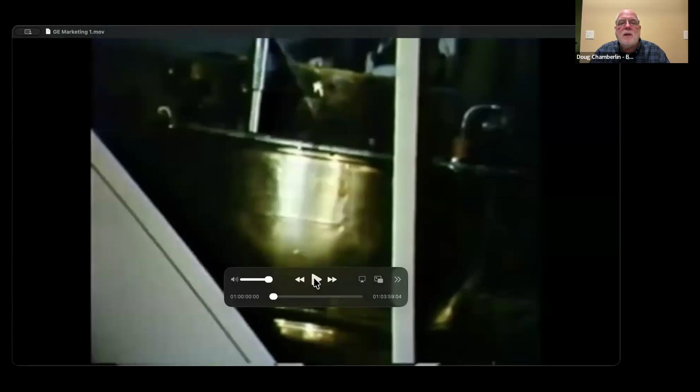We were, of course, absolutely elated with the recovery of the Discoverer 13 capsule. We had been trying for months. We'd had 11 attempts prior to that, and this was the first successful recovery of a man-made object from space. It put the Air Force in a position to proceed with programs that it had been planning and thinking about for a good many years.

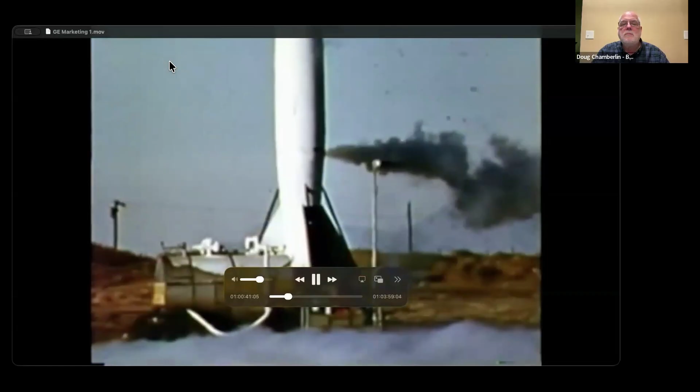I just lost audio. Oh yeah, I've lost audio too. Let's just give it a second. No audio. Can you hear me talking? Yes, okay, I'm working on that.

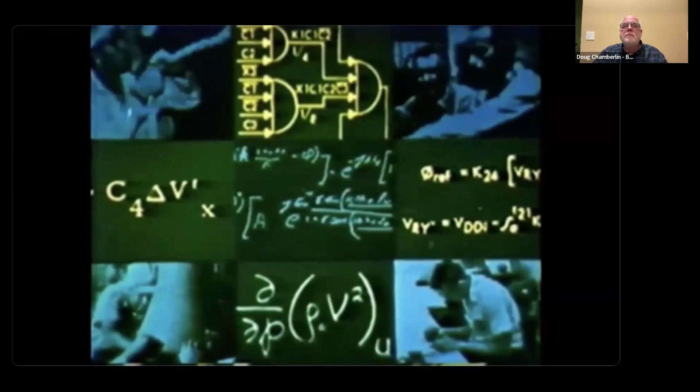Develop an ICBM having a range of 5,500 miles and a 1,500-pound warhead with a yield of 1 megaton should make this an extremely effective strategic weapon in the sense of having great deterrent capability. It became obvious, however, that the Russians were working very hard on a long-range ballistic missile, an ICBM. Through GE as a contractor, radar was installed in Turkey. It was within a few months that we had hard evidence that indeed the Soviets were carrying on a major effort to develop a long-range ballistic missile.

An ICBM program had been authorized. I was given top priority in selecting the people I considered most qualified to work in a program of this kind. A considerable number of academic people from universities entered into the program. We received support from top management in every major company involved in the Atlas program. I recall a letter I got from LaPierre of General Electric in March 1955, in which he indicated the complete support of GE and their desire to be considered as a nose cone contractor.

We were not the only ones working around the clock. So were the people in industry working around the clock. And it was just that kind of a program. Everybody had such dedication and felt this was so important that time, number of hours, meant nothing.

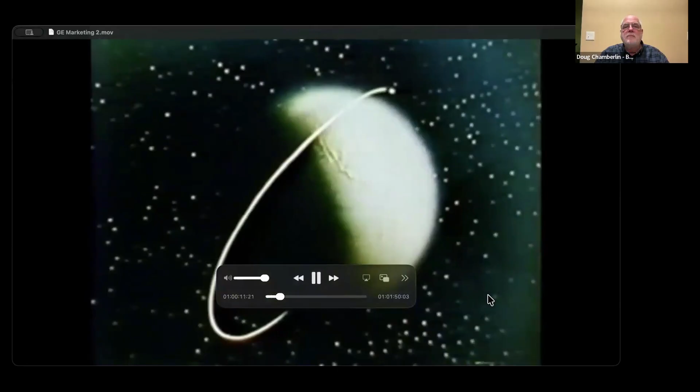So this, of course, is Sputnik.

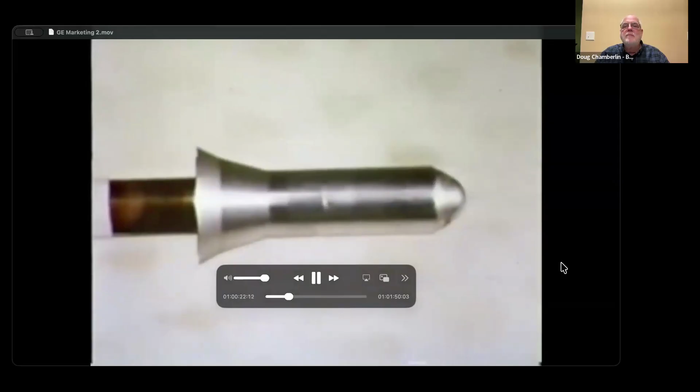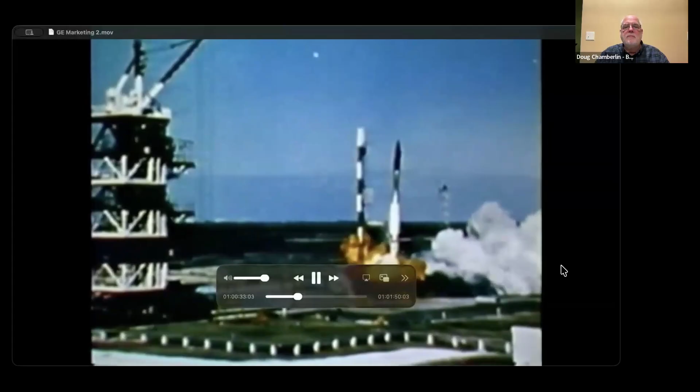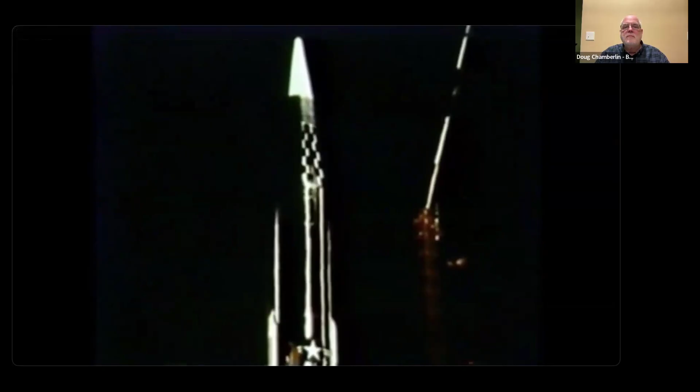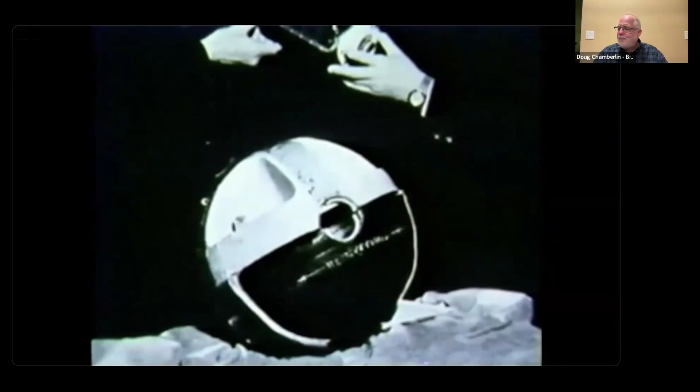As work continued on the Mark II, other test programs were started for new high-performance advanced vehicles, all of which added to America's arsenal of knowledge. The early years had their share of spectacular failures and disappointments, but the lessons learned from these problems and continuous determined effort led to success. The progress was steady and sure as the business grew. The creation of NASA in July 1958 gave solid evidence of increasing government interest and support. Just one month earlier, a data capsule from a Mark II reentry vehicle was recovered, the first payload ever recovered from space. It was one of an impressive list of GE firsts, providing proof of our growing sophistication and capabilities.

The late 50s represented the beginnings of the space age. We ourselves at that time were heavily involved in the reentry systems business, solving the reentry problem of a vehicle coming in from outer space. During that period, we achieved a very impressive list of firsts, and we were involved in a very broad spectrum of technologies. This put us in a strong position for the more sophisticated work of the 60s as it approached us.

So there they were talking about the Mark II, which was an ICBM designation, where GE was working on the Mark I, and then the Mark II. You heard references there to the space part of the mission and so forth. That was all part of the Corona stuff, but of course they couldn't put that information into a marketing video. Those videos were from 1978.

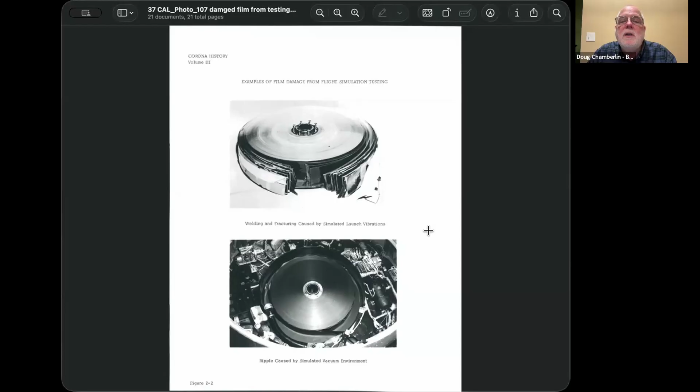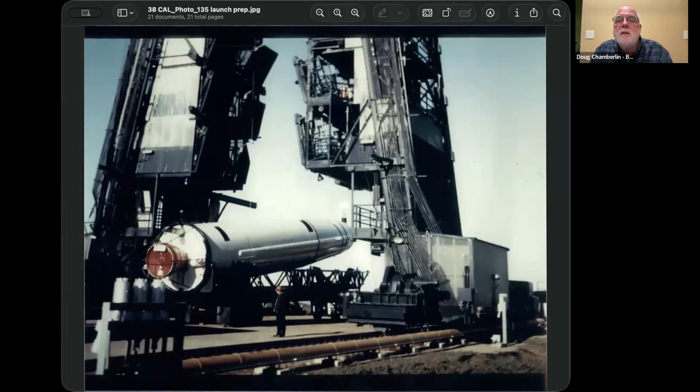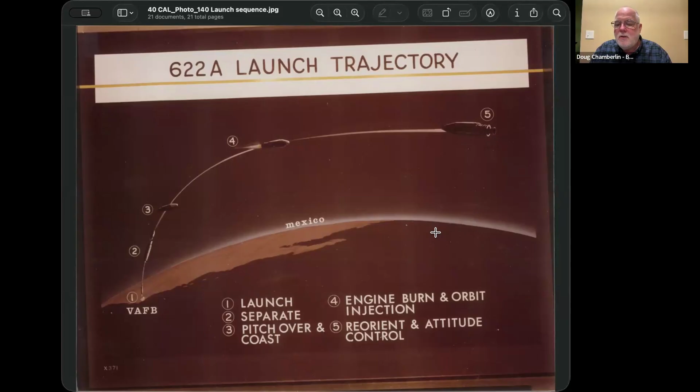So this is a diagram of the launch sequence and the trajectory, and it would come up flying to the south. It would separate from the first booster, and the Agena second stage, number 4 there, would fire, and eventually it would burn out and inject itself into orbit. And at some point it would flip itself around horizontally. It had attitude rockets that were gas-fired rockets, called cold gas because they weren't burning fuel, but they were just spewing gas out in order to rotate the satellite around. I'm not sure if they rotated it and then took pictures, or if they took the pictures first and then rotated it just before reentry. That wasn't clear in anything I was reading, but the thing rotated around so that the nose was pointing backwards.

And when they initiated the reentry sequence, the explosive bolts would release — there was a spring in there actually, so the bolts were holding the recovery vehicle onto the satellite with the spring compressed. And when the bolts were released, the spring would push the recovery vehicle away from the satellite.

It would then have its own short-term solid fuel rocket that would burn for a short period to slow it down enough so that it would deorbit. It would then spin with cold gas rockets around the edge — four of them — that would spin it, and that gave it stability. And so it would orient itself with the nose cone down. Then it would fall down through the atmosphere.

And about 50,000 feet is when the first parachute would open. There were three separate parachutes: a tiny one that would help stabilize it, then a second one with strong enough drag that it would pull the main parachute out. Then that would deploy and it would start falling slower and slower, slow enough for the airplane to snag it. The target altitude for that was, I think, between 10 and 20,000 feet, but closer to 10. It was falling slow enough that the airplanes had multiple chances to fly by and snag it. In fact, the Discoverer 14 mission took them 3 tries to actually capture the recovery vehicle.

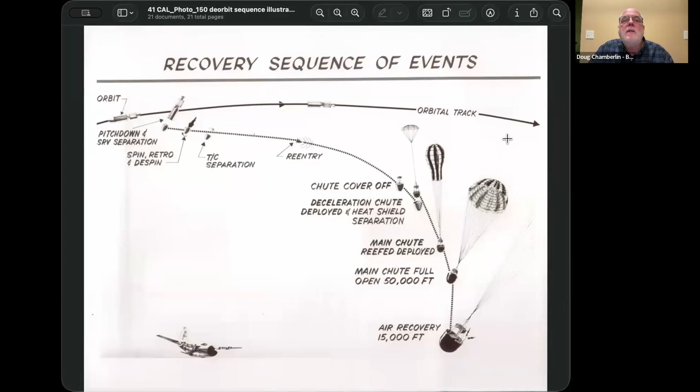Yeah, it got really hot. It got hot enough that the air around the capsule they would call plasma. It was up in the multiple thousands of degrees, and one of the things they had to invent was a heat shield that covered the blunt end of the recovery vehicle that could withstand that kind of heat and not transmit it inside to the film, because they really had to protect that.

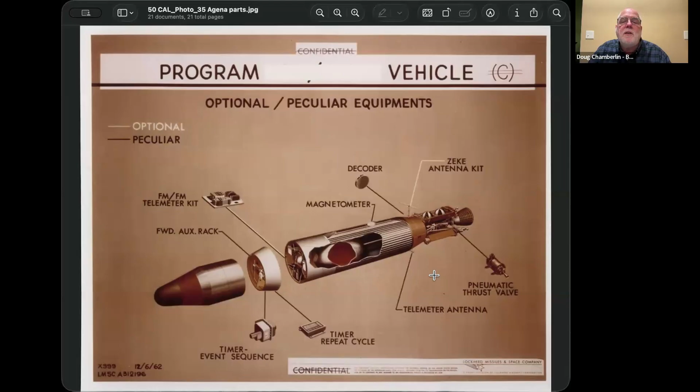This is just another diagram of the satellite, the Agena, and the whited out area at the top I'm sure said Corona/Discoverer. You can see there was a fair amount of space taken up by propellant and the second stage rocket engine. Then there was telemetry, and the left-hand chunk there was all the camera, the film, and the recovery vehicle.

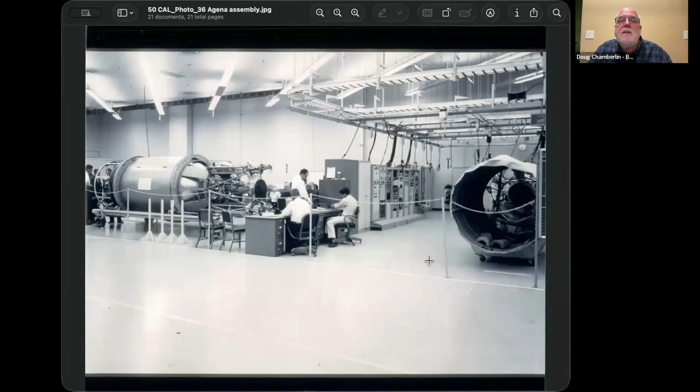There's a picture of them assembling the Agena at Lockheed. Here's a picture of a later satellite, because this one here you can see on the left there were two spools to take up the film. The one that's in the satellite itself has a metal collar around it with some circuitry, mounted where it would go, and then the second one would go on the front of that, where the lower spool would get lifted up and put into there. On the right-hand end, you could see the port where the lens for the camera is sticking out to the side.

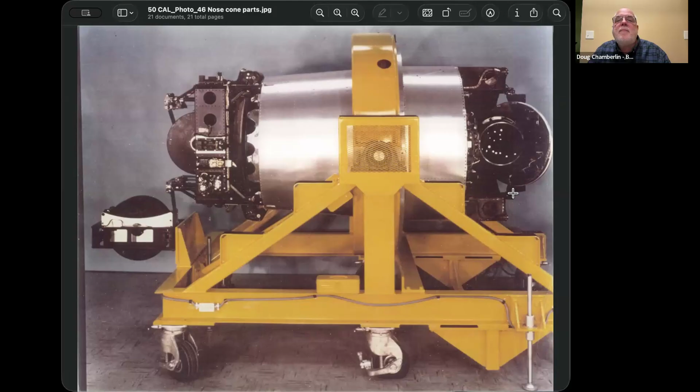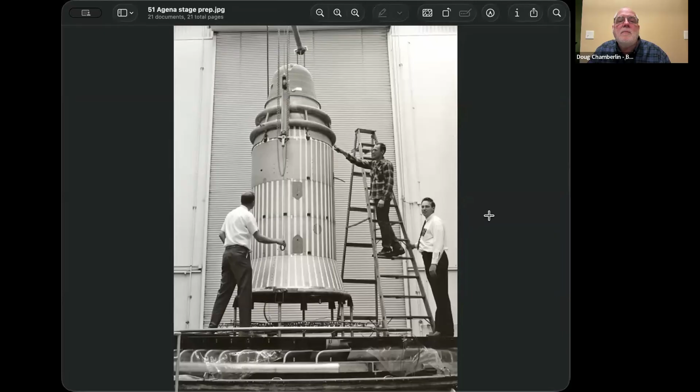And here's some engineers playing around with what looks to me to be a fully assembled satellite.

One was pointed slightly ahead of where the satellite was, and one was pointed slightly behind. They would take pictures of the same thing, but as the satellite moved over the target, first one of them took a picture, and then as it moved farther, the second camera would get to take pictures of it. Then they'd compare them together with stereo viewers, and mostly from the shadows of what was below, the stereo view gave them a sense of how tall things were.

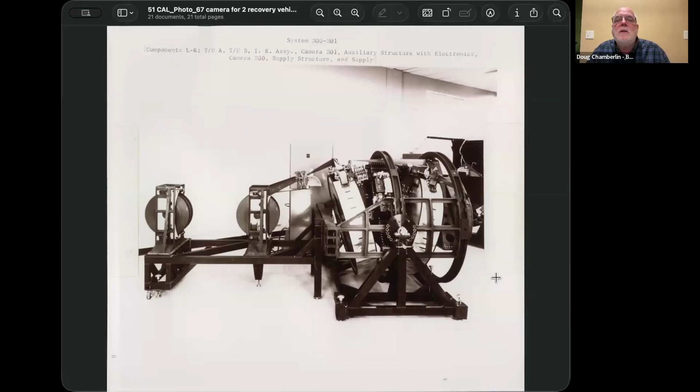But this was not the original design. This is the one that started around '63 and went through the mid 60s. Here's an engineering diagram of the path that the film took when it was fed to the two different SRVs, the satellite recovery vehicles.

The SRV-A is the feed in the middle of the diagram going off to the left, and SRV-B is the feed that's down to the lower left. There was a mechanism in the center with a pressure pad and a cutter that would cut the film, ending the first SRV's film, and then it would automatically start feeding to the second one. So it's a reasonably mid-level complex mechanism to do this.

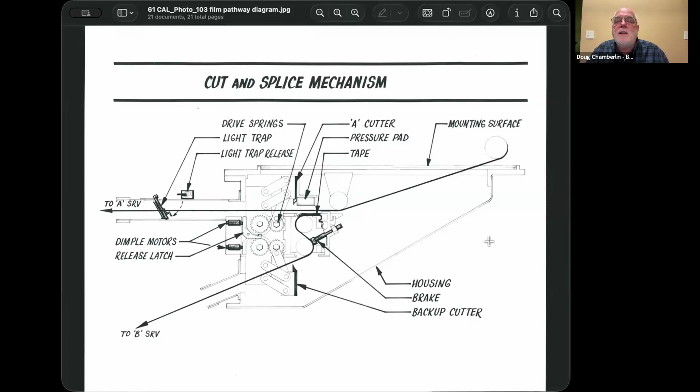And of course, it was all unattended, so it had to be pretty reliable. Here's another diagram from that same era with the two recovery vehicles drawn out, including the spool of film and the little rocket behind it with a nozzle pointing to the right. That's just ahead of the two cameras, which are angled on the right-hand side. And then the spool of unexposed film is on the very right-hand side.

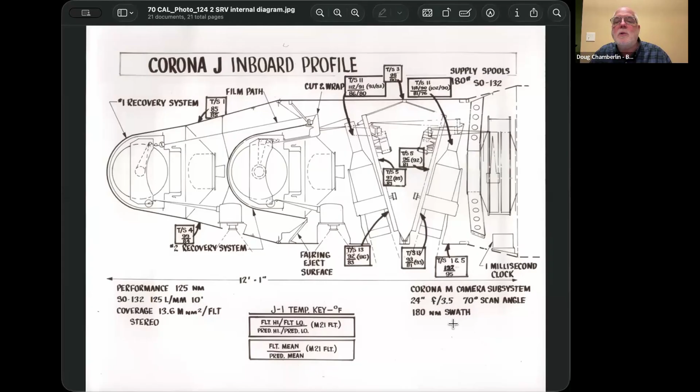So it was perpendicular to the camera, and the film would have to come out, turn 90 degrees, and then feed over to the cameras. This was Corona M. The Corona J was the overall mission refinement, but the camera was Corona M, which stands for mural, and that gave them the stereo view.

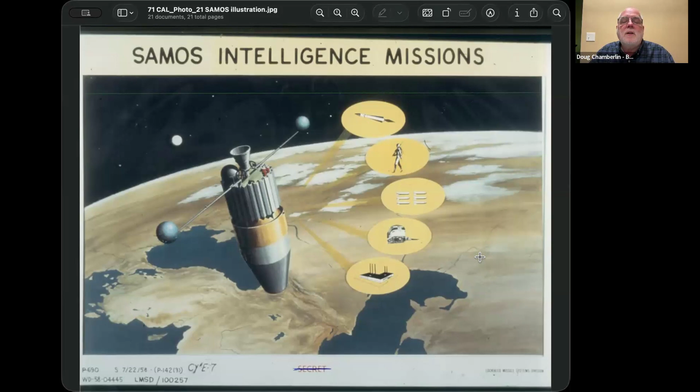This system never really got off the ground. The project only lasted maybe a year and a half or so. But it was developed right alongside the Corona program for a while. And that's the end of the slideshow.

A bit of context - part of the reason for the lag was that a typical studio television camera of that era weighed about 300 pounds, and there was no way you were going to put that into space. Television back in the 50s was also pretty low resolution by comparison. So it was a huge step forward to actually find something capable of taking images from space, digitizing it, and sending it back to Earth, given the technology limits at the time.

Yep. So I hope that gives you a beginning to end view of what the missions were like, the trajectories and so forth. I got to tell you, Doug, I'm blown away that thing worked. I mean, you think about the complexity of that and all the things - it's impossible that it worked.

Well, what really impresses me is that they had very, very limited feedback on what worked, what didn't work, how well it worked, because they had very limited telemetry that they could measure. They could measure the sequence of things, and some of these components had the ability to record that you told it to turn on. Yes, I turned on.